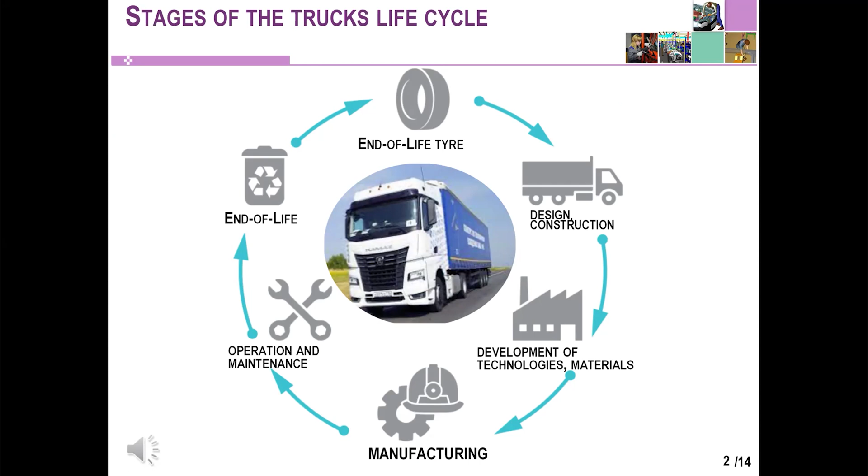Welding of metals is widely used in modern technology and is considered one of the most significant technological processes in many areas of mechanical engineering. In many cases, welding is a more effective or the only possible method for creating permanent connections and obtaining resource-saving blanks that are as close as possible in geometry and optimal shape to the finished part or structure.

Due to the complexity of designing welding technologies, today there is no specialized system in mechanical engineering that allows automating the process of developing technological documentation for welding. Basically, existing systems only allow automating the process of storing and using technology as a document. In other words, they allow simplifying document flow at the enterprise.

However, such systems do not provide any assistance in developing the content of technological documentation, which does not eliminate the main drawback of the process of designing welding technologies: the influence of subjective characteristics of the technologist on the quality of the technological process he is developing.

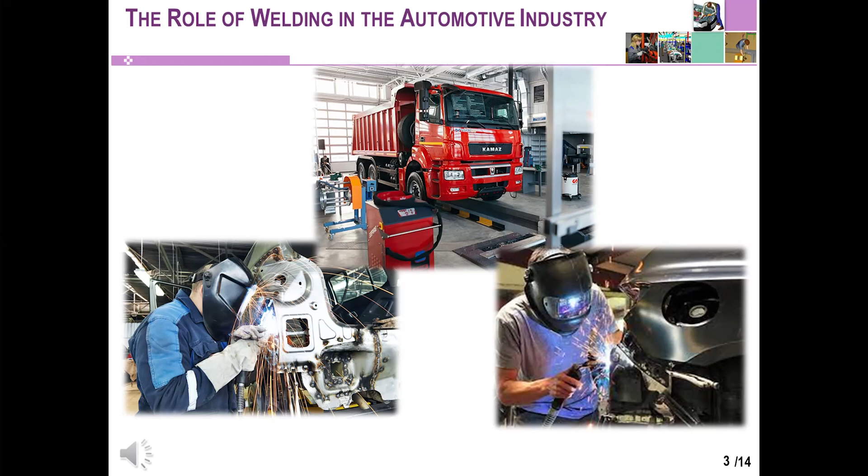Reasons that make it difficult to ensure the quality of welding work. Technological services work according to traditional old reference books, which does not allow specifying welding modes, leads to uncontrollability of processes and the impossibility of influencing quality. Inaccurate determination by technological services of the locations of technological strips, spacers, inaccurate design of the sequence of execution and the length of welded seams, which leads to large residual stresses and deformations in structures after welding. Low qualification of personnel performing welding work.

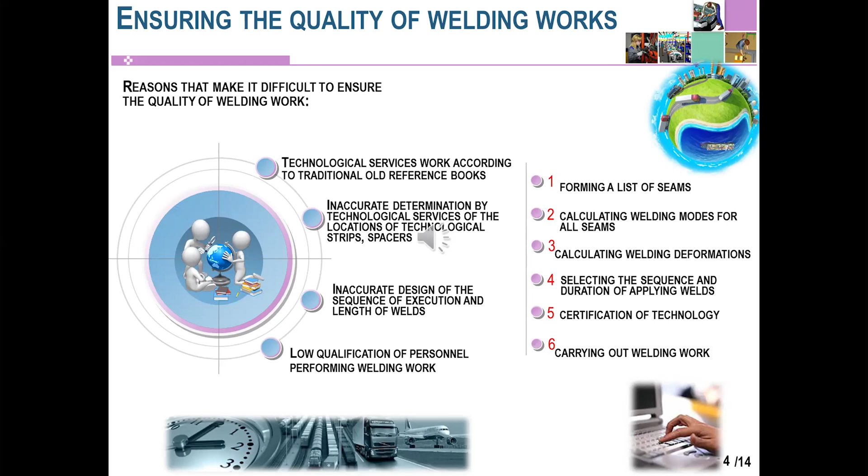The quality of welded structures can be improved by using modern methods of computer modeling in the technological preparation of production and repair. The use of the developed automated design systems allows to reduce the labor intensity of developing one technological map of the assembly welding process by 8 times, to reduce the cost of wages for the development of each technological map by 10 times, to reduce the cost of developing one technological process map by up to 15 times, allows to significantly improve the quality of the documentation being developed, and to sharply reduce the dependence of the quality of the documentation on the qualification characteristics of the designer.

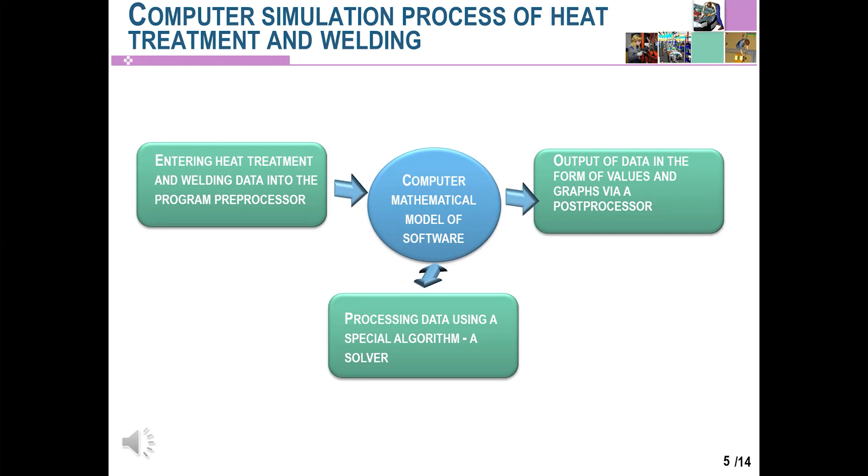Virtual modeling allows to significantly reduce the number of full-scale experiments by replacing them with fast, efficient and highly accurate computer modeling based on the created virtual models. Detection of defects at the stage of development of the technological process. Acceleration of the process of introduction of new parts into production and reduction of costs. All these are the goals of computer modeling of welding.

To substantiate the relevance and importance of the use of modeling of the welding process in large-scale production, it is proposed to consider a specific case of modeling. The fuel tank bracket has a defect of warping of the structure after welding, which leads to non-compliance with the design documentation requirements. We need to model the welding of the fuel tank bracket, compare the modeling results with measurements, and make suggestions for improving the process.

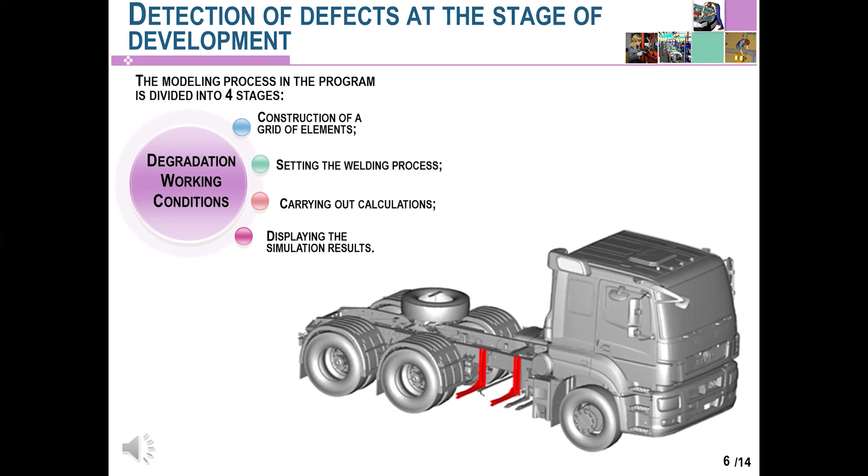Changing the input data for modeling the bracket required repeated modeling. As a result, correct modeling of the bracket welding process was achieved. Recommendations for welding are: change the order of creating welds, and strictly observe the welding direction. Avoid using rigid fastenings during cooling. Fixing the part will prevent shrinkage deformation, but will cause stress in the fixed areas.

It would be possible to avoid large costs for the production of the product we considered, if the modeling was carried out at the stage of developing its 3D model and writing the technological process for its production.

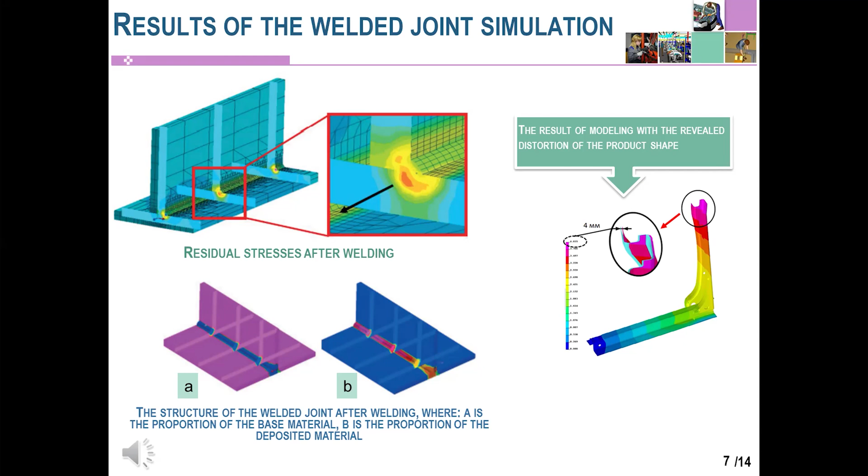The second weld joint case study concerns a component that impacts driver safety. The average truck driver spends more than 40 hours a week behind the wheel. Such prolonged sitting results in musculoskeletal disorders, soft tissue damage, ligament strains, and muscle strains. Drivers often cite ergonomic issues related to getting in and out of the cab or discomfort during long-term vehicle use. This will ultimately lead to ergonomic injuries or worsen existing conditions.

Getting out of the truck can lead to injuries if drivers do not use 3 points of contact. When getting in and out of the cab, a low step and a flat cab floor improve the driver's daily work and make it more comfortable. Many truck drivers are injured each year due to falls when getting in and out of the vehicle.

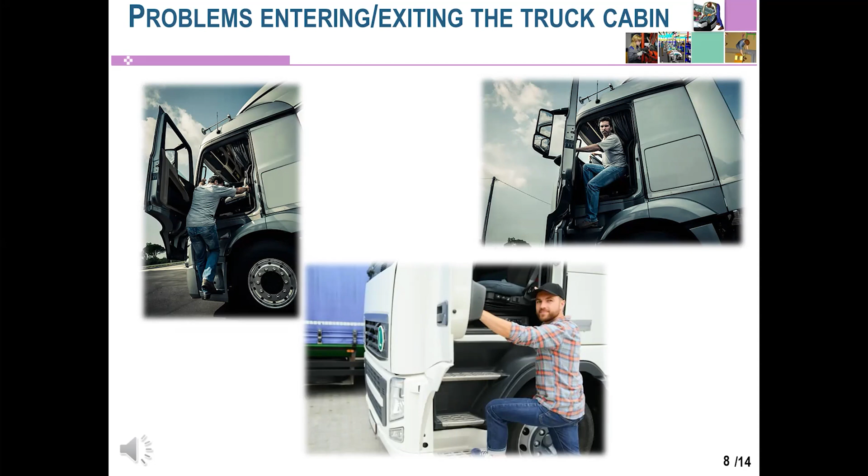Simulation allows assessing the suitability of steps and handrails as a system, since driver health problems affect the safety of other vehicles, cargo safety, and the quality of transport and logistics processes in general. Automakers are taking steps to include real-time driver health monitoring in the vehicle system.

Currently, there are many tools that allow you to determine many indicators of a technical system at the design stage without resorting to expensive experiments. These are strength and dynamic characteristics, various parameters of the system's operation, including ergonomic characteristics.

There are software tools that allow you to select the most suitable design solution at the design stage that can provide a safe and ergonomic working environment, and also, if problems are identified at the operational stage, find an option to adjust the design to solve the problem.

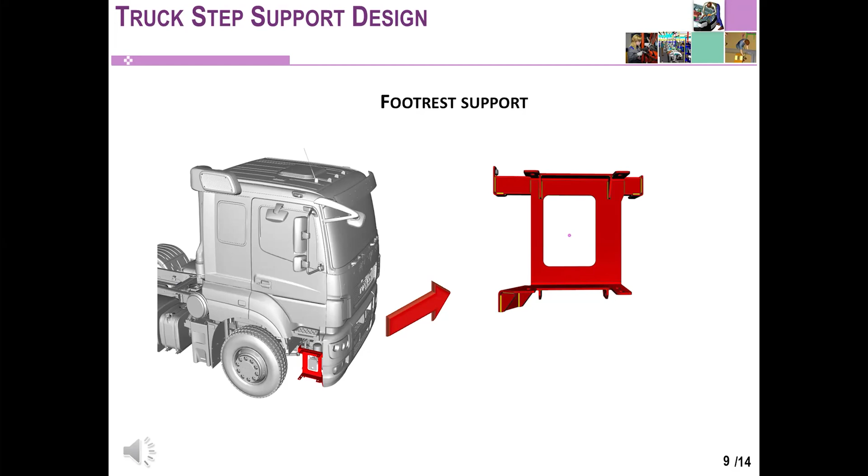Since the cause of the defect could be defects in the welds, it was decided to conduct a simulation of the welding process in the as-is mode to identify problem areas and develop recommendations for improving the process. The following were used to model the process: a 3D model of the construction part, design documentation indicating the material of the part, a description of the process with the order of fastening and creating welds.

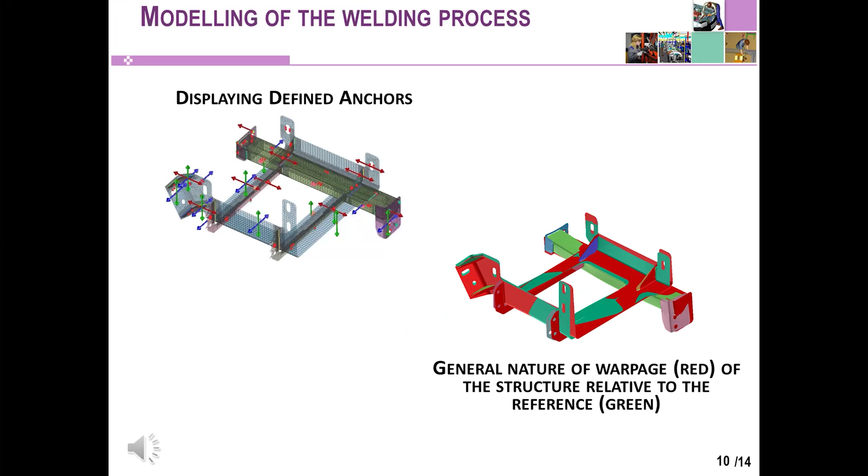After analyzing the results of the process modeling, it was found that due to the close location of several welds, temperature fields overlap. This leads to significant deviations in shape. The general nature of the warping of the structure is shown on the slide. Based on the simulation results, recommendations were formulated to improve the welding process of the footrest support.

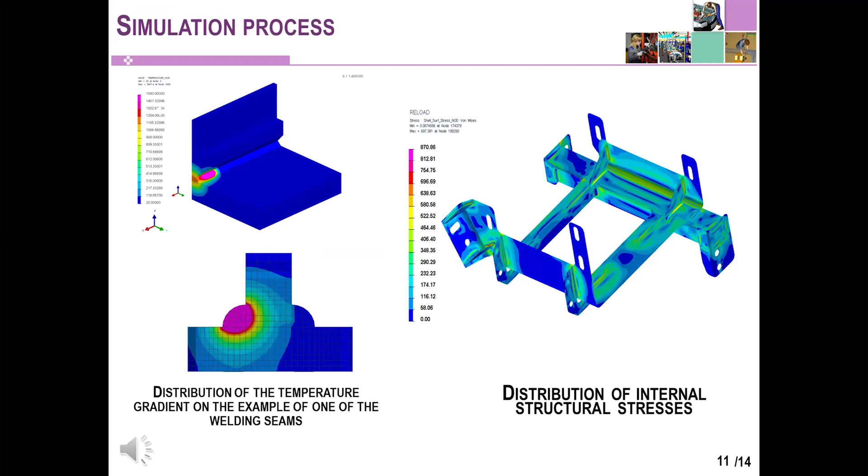Consider the possibility of manufacturing the structure using a modular principle. Use a different welding technology for the footrest support. When designing welding equipment, avoid planning hard-to-reach seams in the product design. When welding the structure, avoid cross seams. The longer the seam and the larger its cross-section, the greater the amount of warping. Provide forced ventilation of the structure in the technology. Avoid using rigid fasteners during cooling.

After changing the technological process, modeling was performed, as well as a design check for manufacturability. As a result, it was established that the design parameters had improved and met the requirements. The formulated recommendations, after the necessary approvals, are reflected in the technological process of manufacturing the product, which is a guarantee against the recurrence of the defect.

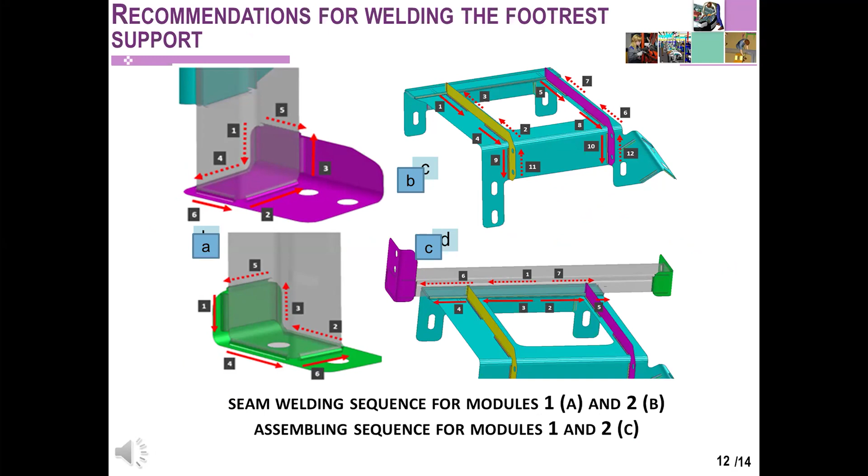Given the current level and pace of development of industry and technology, issues related to development, design and production require equally fast and modern solutions. Improving the quality of decisions taken, eliminating errors at earlier stages leads to a reduction in costs at subsequent stages, especially at the stages of implementation and production, and ultimately to a significant reduction in the cost of the entire project. Improving the welding process will increase the reliability of the truck and the safety of operation.